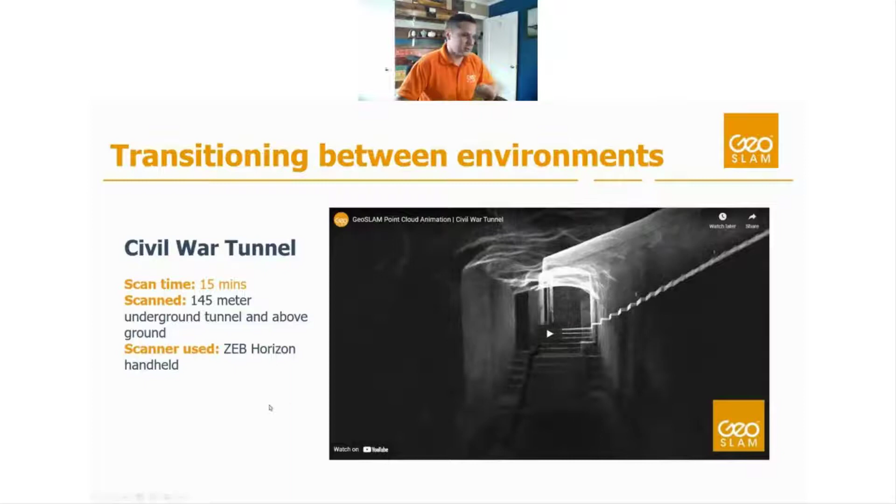I'm going to play this real quick and let you guys take a look at the data.

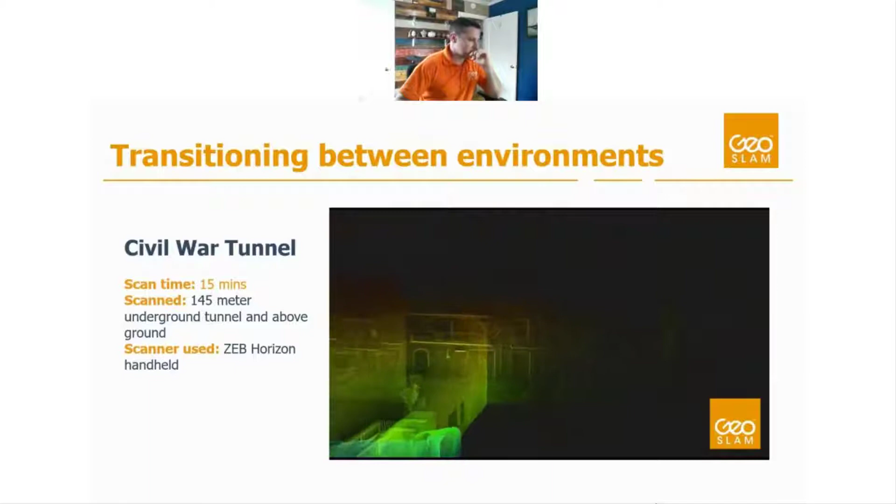All right, you gotta love that dramatic music, but that was a really nice use case of how we can use GeoSLAM technology in a variety of different environments.

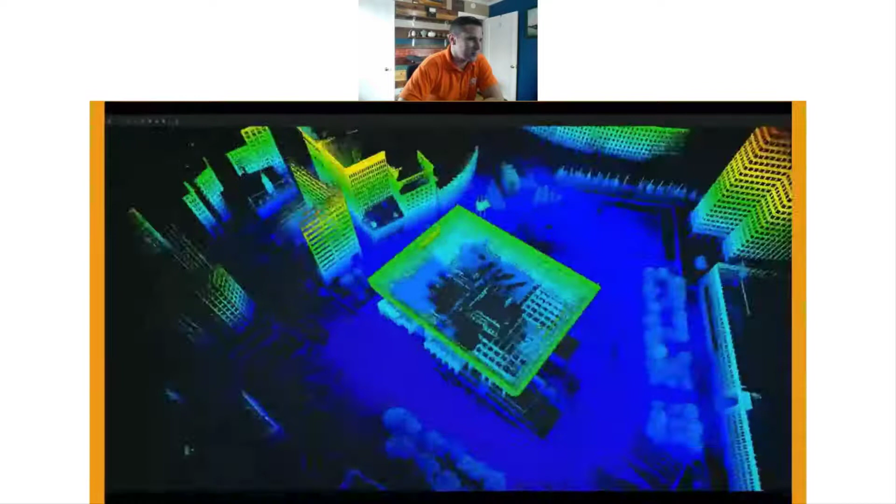Excellent, shout out to the marketing team for that video. That's a great video - I like the music on that one a little bit better too, if it means anything.

So I want to talk a little bit about scan to BIM. These two technologies really work in conjunction with each other quite seamlessly, and GeoSLAM gives you the tools to do this process a lot faster and save you a lot of time in field capture.

I wanted to highlight some projects we've done as a company with our customers in the field of scan to BIM, which is essentially the process of taking this data and turning it into an informational 3D model. On this page we have examples of a 15-story building captured top to bottom and exterior as well with the GeoSLAM system.

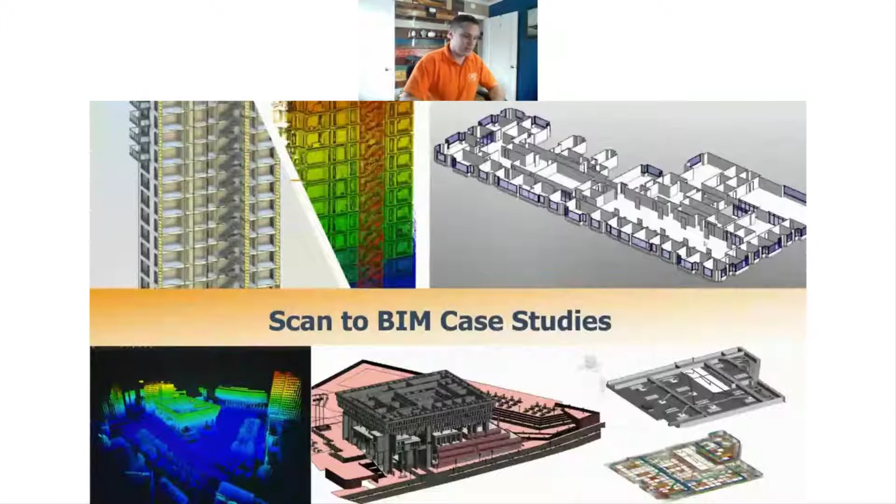Actually, the one at the top right is the data set I showed you earlier - that's kind of a crosscut of the Revit model we created from it. Boston City Hall, the data set we just showed you, is down at the bottom, and then some above-ceiling capture as well. Being able to capture above ceiling and ceiling voids is really easy with the GeoSLAM system, and then modeling duct, electrical, plumbing and things like that above ceiling is quite easy from our data as well.

But before we talk about a couple more use cases, I wanted to talk about our GeoSLAM Draw package. GeoSLAM Draw is basically a software package that allows you to take this point cloud data and create views and prepare your data, as well as extract information like line work and even 3D BIM model elements, and then put that into a third-party platform like Revit, Bentley, ArchiCAD, things like that. We offer a few different modules of this.

The basic version is the Start module. The Plan module allows you to do a lot of 2D workflows. The BIM module allows you to go more into 3D and extract 3D elements. Mining has some tools around volumetrics and other meshing for the mining industry, and then the Pro package pretty much gives it all to you right away.

So it's very, very powerful software - definitely look into it a little bit more on our website, and I'm happy to do a demo anytime if you'd like to see more about this Draw platform. It's one of the crucial components when we're doing scan to BIM work, and I use it for pretty much every scan to BIM project I work on.

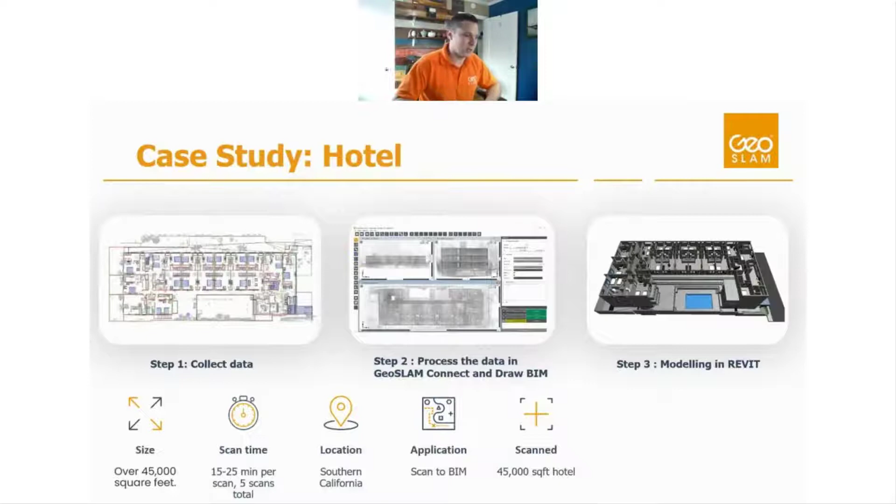Similar to the ZEB Go, we have the Revo RT. It has very similar specs, but the biggest difference is that the Revo RT is processing and stitching that data in real time. It also gives you the ability to connect a mobile device to the system, and via Wi-Fi signal you can actually watch your progress through that space. So if you're doing interior spaces, it's a really nice system to use to make sure you haven't missed anything, that you've properly tied your data together, that you haven't gotten lost. I actually have used it a couple times to get unlost in the building while I'm scanning.

And then we have the ZEB Horizon. I kind of refer to that as the big brother of the ZEB family, but it has longer range, higher point density, and works really well in almost any environment, but its primary focus is outdoor, larger scale projects. Because we have so much more data, it also has very robust SLAM processing, so we can use it for a lot of different versatile types of capture, like you saw in some of the previous slides.